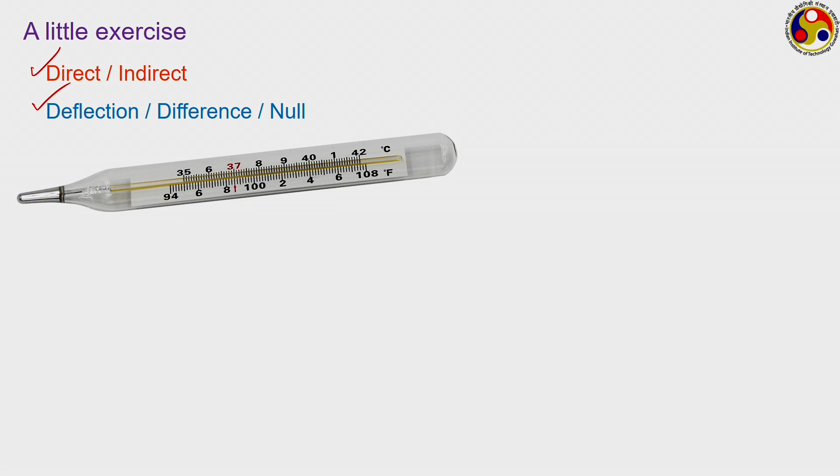Let us move to the next one, a common balance, another example we discussed yesterday. Here again you have measurement on one side, standard on the other side, so they are very close to each other, and it is a direct measurement, the direct comparison between the measurement and standard.

But what about the second category? Here also we have a pointer which gets deflected, but this pointer itself does not show the mass of whatever you have kept. Rather, our objective is to set the pointer to a 0 value to complete the measurement, meaning it is a null kind of measurement, where we put the measurement on one side and adjust the amount of standard on the other side to ensure the pointer comes to that null or 0 position. So, it is the best example of a null type measurement.

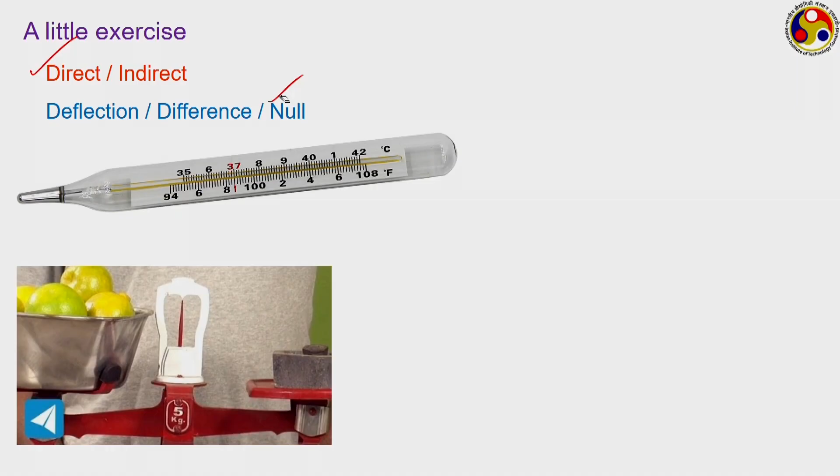Let us move to a third example. This is a common pipette which we use for taking some volume of liquid or measuring the volume of liquid. So, again it is a direct type.

Actually, all the examples I have here are direct type, and presently we have idea about very few instruments. As we go on with the course and get idea about several modern instrumentations, you will definitely have more idea about indirect measurement and learn more examples of it, but presently you are sticking only to direct ones, like where I have picked up examples from whatever you already know.

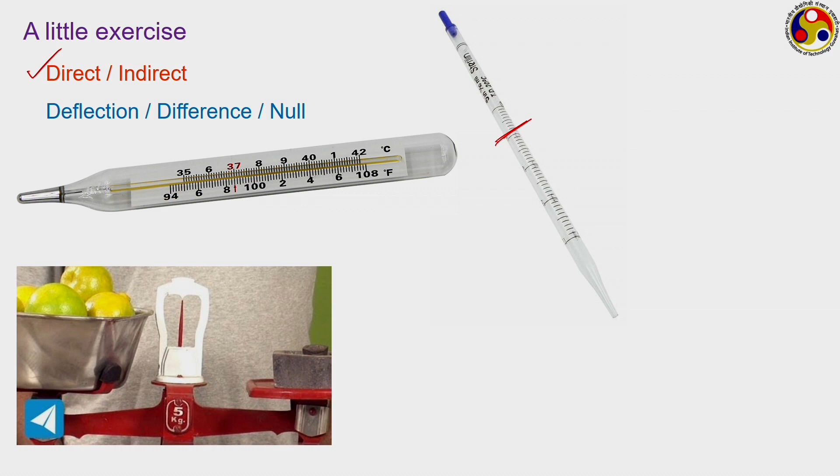So, talk about the second category. Here again the volume of liquid can directly be observed from the scales that are there. That means we are going to take this as a deflection type instrument, or categorize it as a deflection type instrument. Next one, what is this?

This is a common vernier scale or a slide caliper. Here, if we want to measure the length or any other dimension of something, we put it within these two jaws of the caliper and get the measurement from the scale that is somewhere here. Now, what kind of instrument is it?

Definitely a direct kind. And what about the second category? What is our objective? Finally to get a 0 value on the scale, or some number directly on the scale. It is not a 0 value, so it is definitely not a null kind. Whether it is a difference kind—difference means we have some reading on the scale plus a reference, and the value of the reference is added to the reading of the scale to get the final value of the measurement. Here also we are not having any kind of reference, so it again comes under the deflection type.

So, let us move to example number 5. This is the example of a common tire gauge, used to measure the pressure of vehicle tires, where we have a dial and there is a scale on the dial of pressure. Like in this example, you can see there are two scales shown: the inner one is pound per square inch, the outer one is in bar.

1 bar typically corresponds to about 14.7 pound per square inch, commonly called PSI. So, 1 bar corresponds to 14.7 PSI, and the inner scale, where you can see readings of 10, 20, 30 etc., corresponds to that PSI, and the outer scale corresponds to bar. You can also see that the one written on the outside corresponds to the outer scale, the one written inside corresponds to the inner scale.

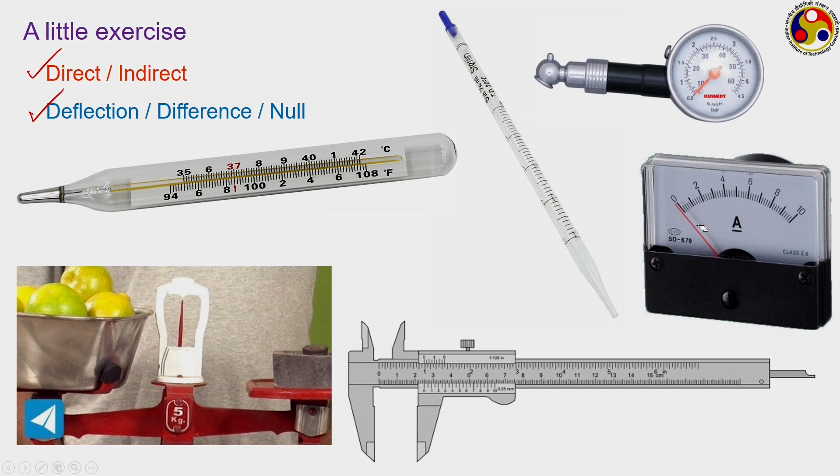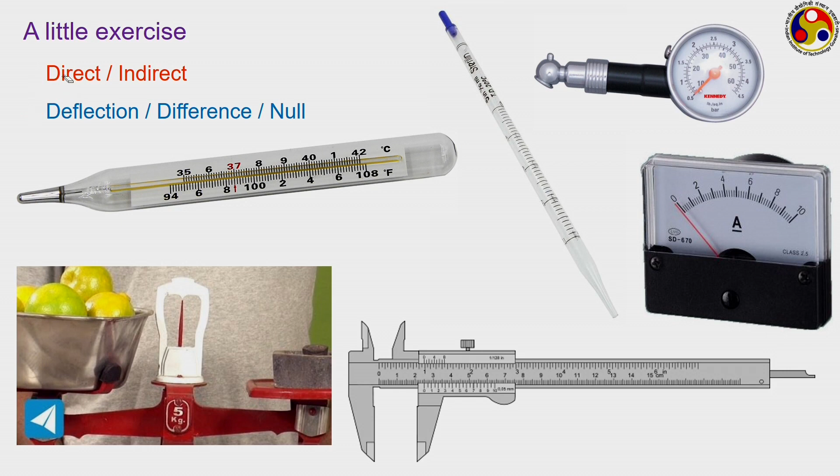So we can classify any instruments into either of these three categories, and all the six examples I have here are direct type, but in the near future in this course you will also be introduced to several indirect kinds of measurements. Now, before I move to the next slide, I would like to point out something else.

Look at this particular one. Here your objective is to measure the mass of something, and as a standard what you are using is also mass. So your measurement and standard both are mass, and hence this is directly giving the value of the mass of your measurement quantity. Similarly, this one is directly giving you the length, this one is directly giving you the volume of the corresponding measurement. But now look at the thermometer.

In the thermometer our objective is to measure temperature, but are we actually measuring temperature directly here? Probably not, because when we take this bulb, which is a pool of mercury commonly, in contact with the human body, then as the human body is at some other temperature than this bulb, there will be a kind of heat transfer. Let us say our human body is at a temperature of 38 degrees Celsius, and the thermometer initially is at 30 degrees Celsius.

Now, this temperature of the body being higher, it is definitely going to lead to a heat transfer from the body to this bulb or to the mercury at the bulb, and on receiving this heat, the temperature of mercury itself will keep on increasing till it attains thermal equilibrium with the body, that is, till the temperature of mercury within the capillary attains this 38 degrees. So there is about 8 degrees Celsius increase in the temperature of the mercury, and like any other material, with increase in temperature, mercury also will expand in volume, and that increase in volume will be manifested as a change in the length of the mercury column within this capillary.

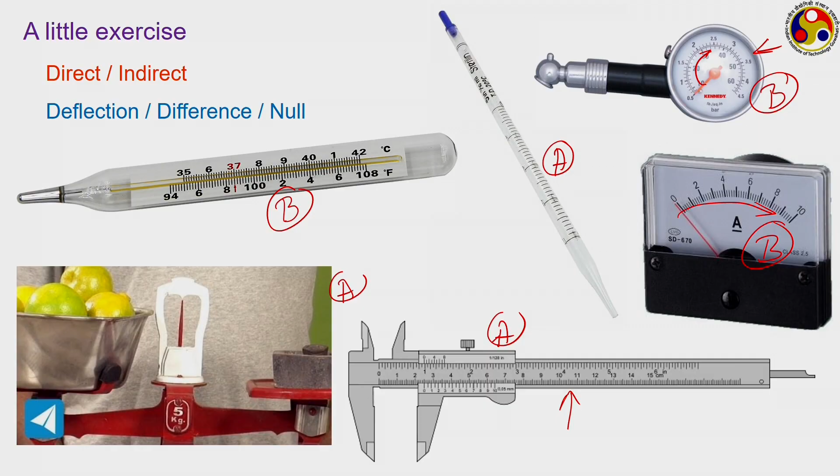But in all Type B instruments, our output comes not in terms of the measurement, but in terms of something else. Like in a thermometer, our objective is to measure temperature or change in temperature, but the output comes in terms of change in volume, or change in length of the mercury column in the capillary. So Type B instruments are probably much more common than Type A, unless in very simple situations like measurement of length, volume or mass, where we can use Type A. For most measurements we have to go for Type B instruments.

In that context, I am going to introduce this particular term, transducer. A transducer is a device which converts energy from one form to another. This particular process of energy conversion is often referred to as transduction.

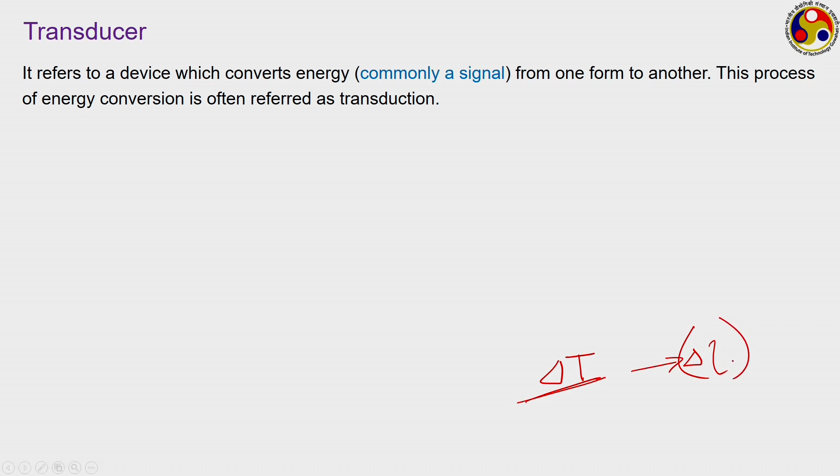Think about the thermometer again. Here our input to the device is some temperature change, delta T. The thermometer was initially at 30 degrees Celsius, and coming in contact with the human body, its temperature increases to 38 degrees. So we have an 8 degree temperature difference, which is the delta T, your actual input signal, but your output comes in terms of a change in length of the mercury column in the capillary. So there is a change in the signal: while our input is a thermal signal, thermal energy, the output gets manifested in terms of a volume or length.

Like in the tire gauge, our input is pressure or force, but the output comes in the form of deflection, and the device that does this is called a transducer. A transducer can be anything, like any measuring instrument, so it can be categorized as a transducer. Depending on the output, we can call it a mechanical transducer, like the pressure gauge, where the input is force and the output is a deflection, which is a mechanical kind of output. Maybe in a thermometer too we can call it a mechanical transducer.

But here is another example where some physical quantity in a transducer gets converted to an analogous signal. Here also you are measuring temperature, the input signal is temperature, but the output signal is some electrical quantity, like what happens in a thermocouple. We shall be talking about thermocouples in the concerned module, but the gist is there: the input has been converted not to a mechanical output like in a common mercury thermometer, but to an electrical quantity. So we shall call this an electrical transducer. We can have mechanical or electrical transducers, and other types also, but mechanical and electrical are the ones commonly used for mechanical measurement.

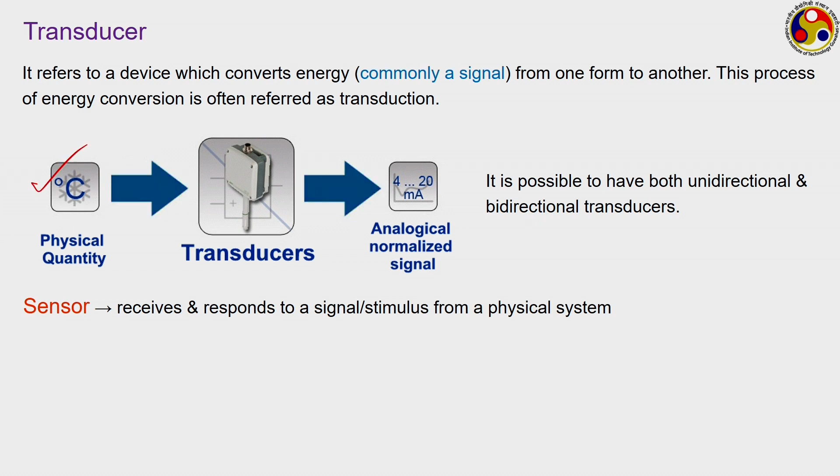Now transducers again we can commonly identify as two types. One is a sensor, which receives the signal from some physical system and prepares an according response, like the example shown here. It is receiving the signal in form of a change in temperature and converting that to an electrical signal which will be used for further processing.

And the other one is actuator. Actuator will take the signal from some processing unit. Sensor generally sends the output to some processing unit commonly, but the actuator will take it from some processing unit or from some control system, and then will perform some kind of mechanical work.

Like in case of that tire gauge, if you think of the pressure signal which is being supplied to your device, it has gone through some steps of conversion by some mechanism. Or we may think about that ammeter, a much better example probably, where we are supplying current as the input. Now your transducer is converting the current to a mechanical signal which leads to the movement of this indicator over the dial. That, we shall be calling an actuator.

So transducers primarily are of two types, sensors and actuators, but we can have other kinds of transducers also. Sensors are primarily related to the input of the measurement system, which is in direct contact with your physical system, takes the input and if required converts it to some other form, whereas actuator takes the input from the control system and primarily is related to the output, giving you the output in the desired form.

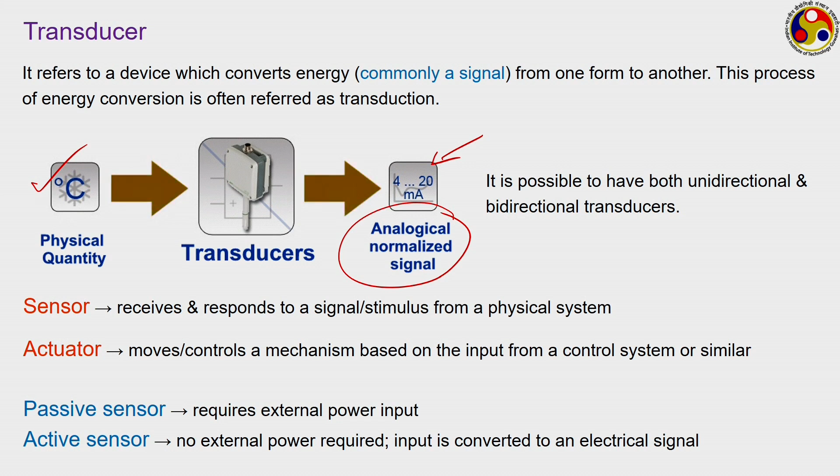We can also have passive and active sensors. Active sensors are those which do not require any external power input, but passive sensors require an external power input. In active sensors, the input itself is converted to an electrical signal, like in this case of a thermocouple, where despite thermal energy being your input, it gets converted to electrical signal, and that electricity itself will be used for further processing. So that is a kind of active sensor. Examples of passive sensors we shall be seeing shortly.

Next we move to the general structure of the measurement system. In a measurement system, all the components, whatever simple or complicated it may be, we can generally identify three different blocks: one detection block or input block, next the signal conditioning block, and next the output block.

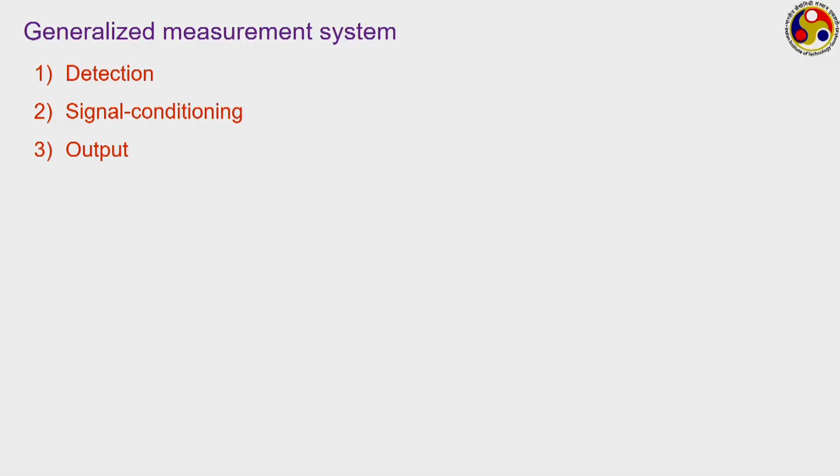There are several characteristics that we want our measurement system to have. It should be low cost, easy to use, not requiring any special expertise, like a thermometer, which is generally easy to use and requires hardly any expertise, such as a common clinical thermometer. So we prefer to measure the temperature of our body using a thermometer, despite having several much more accurate instruments available.

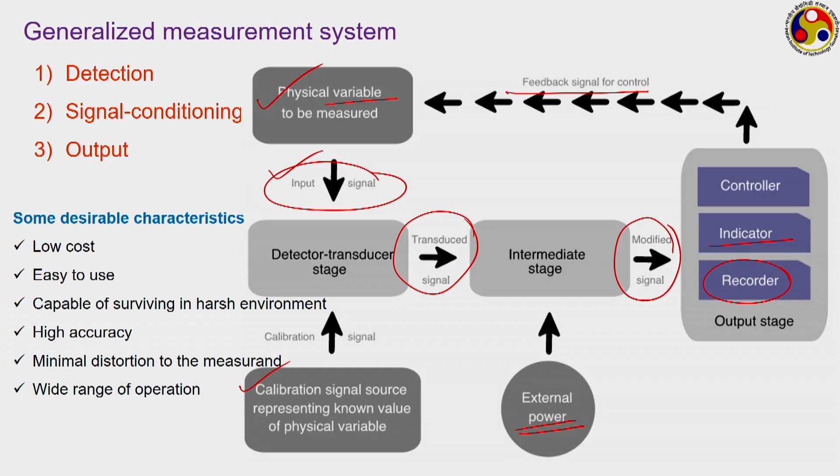Also, the range of operation should be wide, and it should suit whatever target application we have. Next we talk about a few examples again.

First we have a spring balance. Spring balance is used to measure the weight of something. We put the measurement somewhere here, and the corresponding gravitational force causes a deflection of the spring which is inside the body, and the deflection of the spring causes a change in the position of the indicator. So from the final position of the indicator we get the value of the weight in terms of whatever unit we desire, like the example here shows 1 Newton on one side, and maybe in terms of mass scale, kg mass or kg force or gram force, on the other side.

Now try to identify the 3 stages here. What is your input stage here? Your input stage is this hook, which is sensing the gravitational pull on this and converting that to some form of mechanical force on the spring which is inside.

Your processing stage here corresponds to the spring. That spring takes the mechanical pull from this input stage and converts that to some other kind of mechanical pull on the indicator, allowing the indicator to move. So this hook itself is acting as the sensor, which is sensing the input and converting that to some kind of signal which will be used by your processing part, which is the spring.

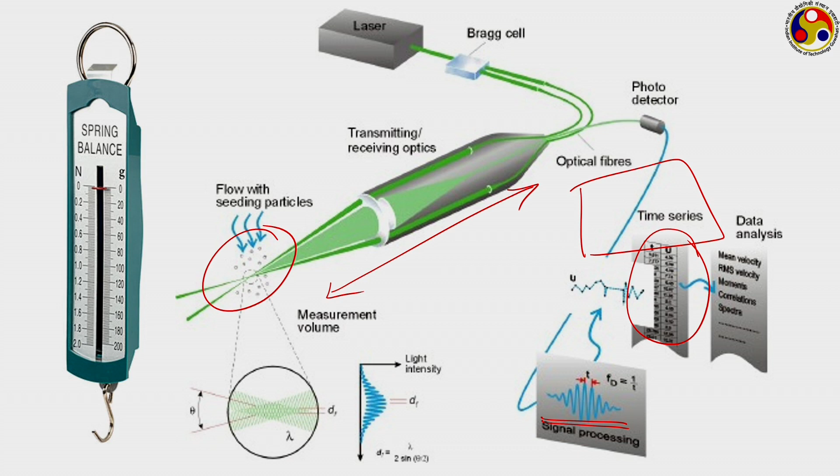Think about the thermometer again, since we keep going back to the same example. What is your input sensor? The mercury bulb is the input sensor. What is the signal processing stage? Again the mercury itself. And finally your output stage is the mercury column and its positioning, the position of the tip of the mercury column on the corresponding scale.

So the same component can also act as multiple stages depending on the instrument. In simple instruments we can find this kind of situation, but in more complicated instruments we can clearly identify three different stages. Now, the input signal.

The input signal can be classified primarily into two categories. One is based upon the time relationship, meaning how the input signal varies with respect to time, and the second is based upon the nature of the magnitude of the input signal.

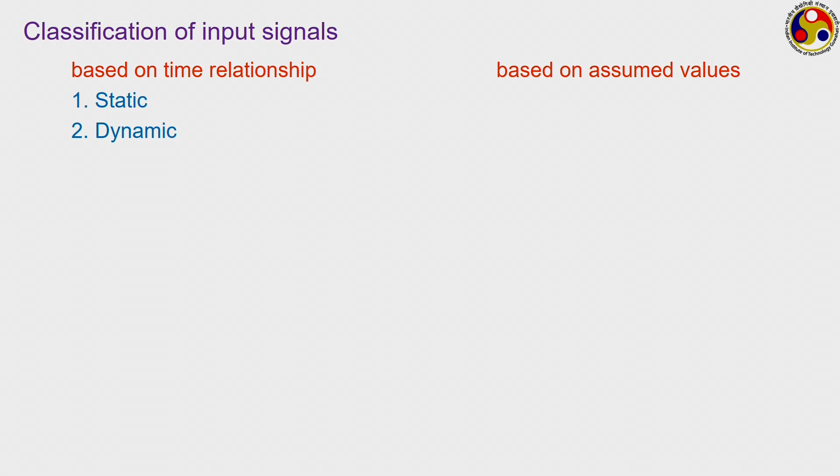Based on time relationship, we can have static or dynamic. Static refers to input that is not changing with time, like when measuring the mass of something using a common balance - the mass of the body is not changing, so that is a static signal. When measuring the pressure of a vehicle tire using a tire gauge, if that pressure is not changing, that is also a static signal.

But a dynamic signal refers to one that keeps on changing with time. Suppose we take some volume of water, put it on an oven, and switch the oven on, so heat is being added to the water. Now we take a temperature measuring instrument and dip it into that pool of water. As the water receives heat, the temperature of the water pool keeps changing, and accordingly the input going to your temperature measuring instrument is also changing. That means it is not a static signal anymore - it's a dynamic signal, one that changes with time.

Dynamic signal can be of two types again: one is steady state periodic signal, the other is non-repetitive transient signal. Periodic means, as the term suggests, we have some kind of periodicity - a cycle of input that gets repeated over a particular interval of time. The other one, when there is no such repetitive nature, we have a non-repetitive signal.

Repetitive signals can be thought of as cycles, like the time of day - over a 12-hour period, time itself gets repeated. We can have high tide and low tide situations where the water level in a river or ocean keeps changing with time. Several common lab-scale instruments can also lead to periodic change. And non-periodic is where we do not have such repetition - like atmospheric temperature, which is generally a non-periodic kind of input that keeps changing with time without any repetition or periodicity.

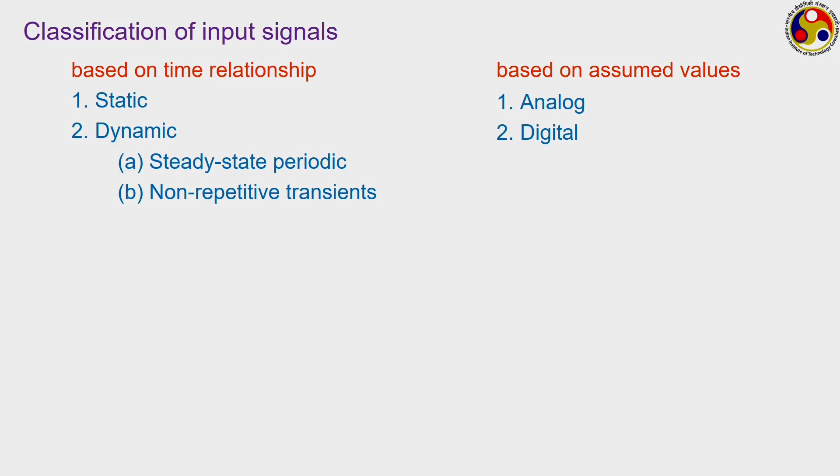Based on assumed value, we have the very common kind of input classification: analog and digital. Analog means it keeps changing with time continuously, and for every time instant we can have a value. Whereas digital means we are picking out the value only at certain time intervals, and instead of having a continuous representation of the input, we have a discrete representation of the input.

Here is an example. The one at the top, shown in green, is an analog input. For every value of time we have some value of the input signal - like here for this time we have a value of input, for this time we have a value of input, and for this time also we have a value of input.

Theoretically speaking, we can have an infinite number of values for the input signal. It is a continuous representation. Such continuous representation we can get in several common instruments, like a thermometer or a tire gauge, where as the temperature keeps changing, the mercury column's tip also keeps changing its position, giving us a continuous representation like the analog one.

Digital, however, is where we are not going to take the signal value at all times, rather only at certain time intervals. Like here we've identified this time where we want to take up the value, so we get this particular value. Next, after a certain time interval apart, we take the second reading here, and we get this value. This way, after a fixed or changeable time interval, we keep getting values of the corresponding signal, like here, another one here, another one here.

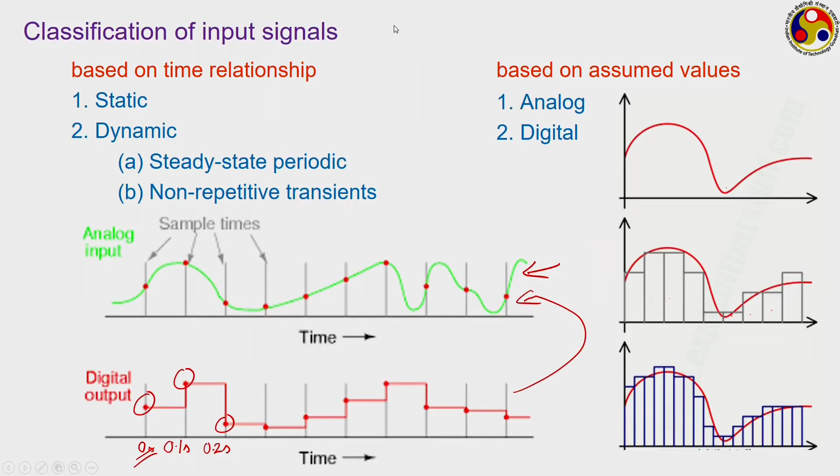But still digitization has its own advantages. In case of analog signal, we get a sine wave or basically a continuous time-varying signal, whereas in case of digital we get only square waves. Like in the previous figure, here we have only square signals. Analog gives continuous representation, digital gives only discrete data points.

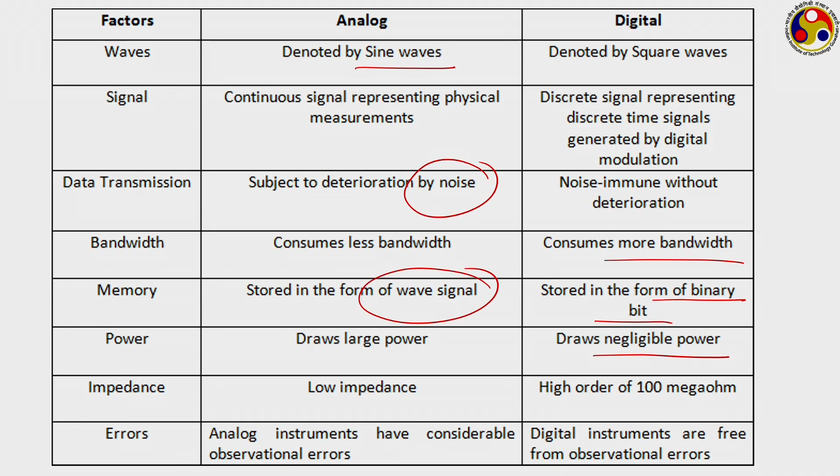In analog there is a big probability of deterioration from noise, as we are acquiring the signal continuously, and interfering signals can also come into picture. In case of digital, as we are taking only certain points, it is highly immune to noise. The bandwidth requirement can of course be much more. In analog we store the signal itself, but in digital we store it in binary or similar format, and the power requirement is also much lesser in digital. It is much easier to process the digital signal during the signal conditioning stage, and that is why digital signal has its own advantages, and that is why the trend for modern instrumentation is to move towards digital.

We shall be discussing more about this digital signal and analog to digital conversion in the third module of our course.

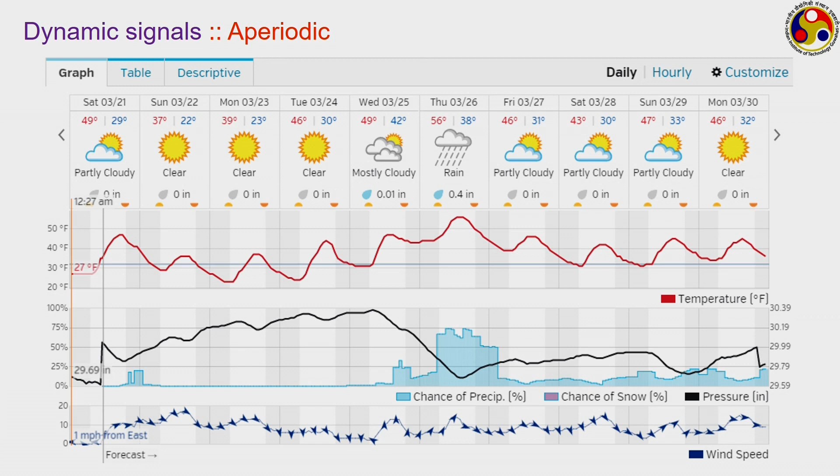Aperiodic signals, like the variation of temperature over a day or over a longer duration, or any kind of weather data, are probably the best example of a dynamic signal which is not periodic in nature at all. In several measurement situations we face aperiodic dynamic signals.

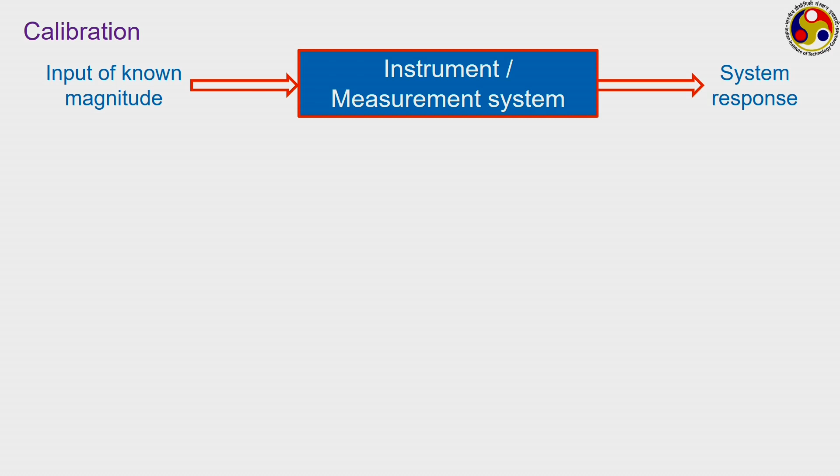Now we come to the stage of calibration. Any instrument has to be calibrated to start with, and calibration means the instrument will be subjected to a known magnitude at the input stage, and whatever response we get at the output stage, in whatever form, we record that and then try to identify the correspondence with the input.

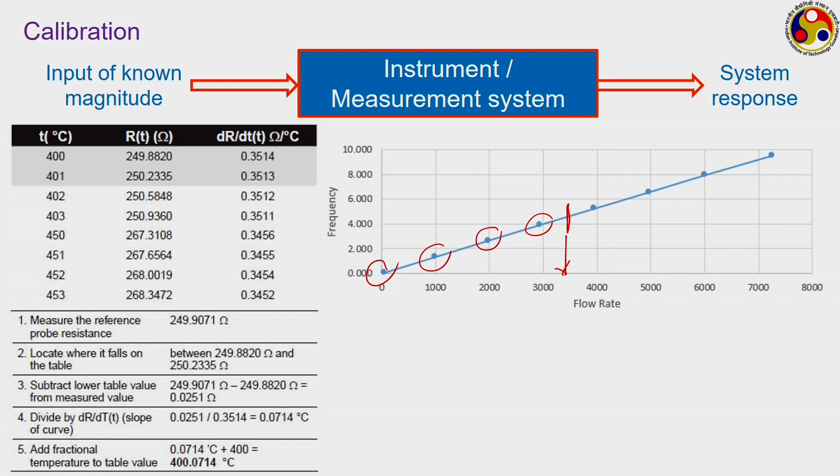This calibration curve generation is a must for any instrument to start with. Generally, whenever we purchase a new instrument, simple or complicated, it comes with a calibration chart provided by the manufacturer, but it may be required to recalibrate the instrument repeatedly after a few periods of operation. When we do calibration based on time-invariant input and output signal, we call that static calibration, and the corresponding curve is called a static characteristic curve or static characteristic. However, when both inputs and outputs, or at least one of them, vary with time, we call that dynamic calibration, which is much more complicated since at every time we can have a different nature of signal. The corresponding curve is called dynamic characteristic.

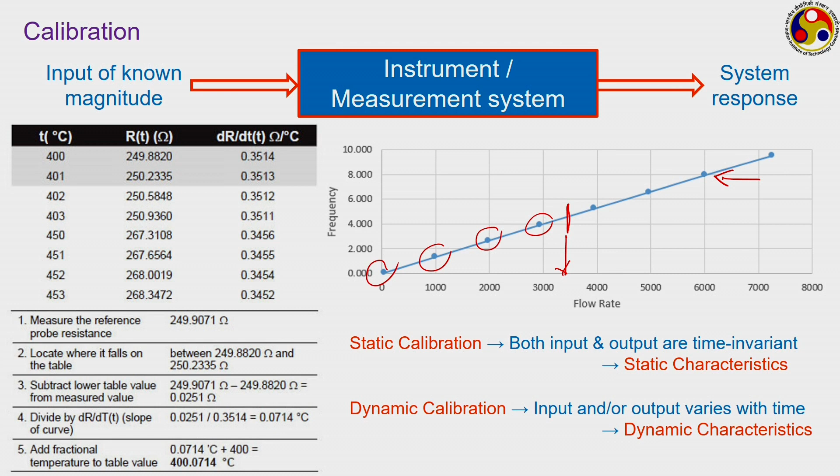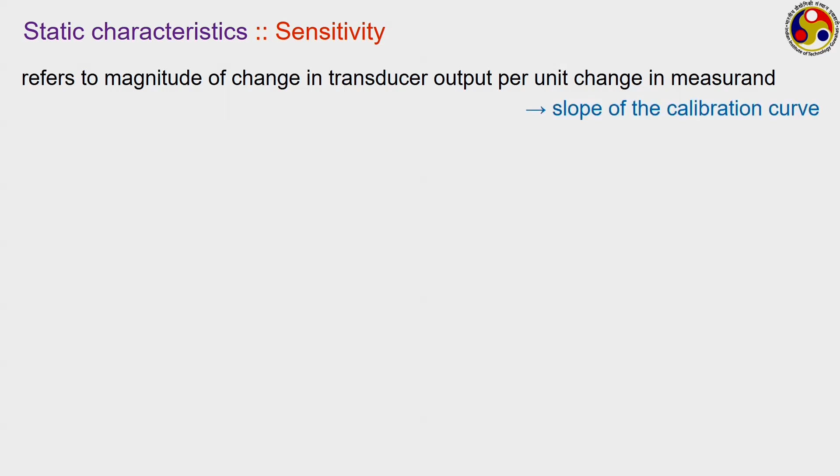Let us discuss a few properties of static characteristics which an instrument must have. The first and most important is sensitivity. Sensitivity refers to the magnitude of change in the transducer output per unit change in the measurand, meaning it gives you the slope of the calibration curve. If x is your input and y is the output from your transducer, then the slope of this curve — this much change in input dx giving this much change in output dy — is the sensitivity of the instrument.

In this particular case the slope does not change with the change in input, so we call it static constant sensitivity. However, we may also face a situation where the sensitivity of the instrument keeps changing with the input — then it is variable sensitivity, because it depends on the input.

Now, do we want higher sensitivity or lower sensitivity for the instrument? Definitely we always want our system to be more sensitive. Think about the thermometer example again. We have a change of 10 degree Celsius temperature. If that 10 degree change causes an increase of 5 mm in the mercury column in case 1, and in another case it causes a 10 mm length change, then which one is more sensitive? Definitely the second one, because the change in output for the same amount of input is more, so it is a more sensitive instrument.

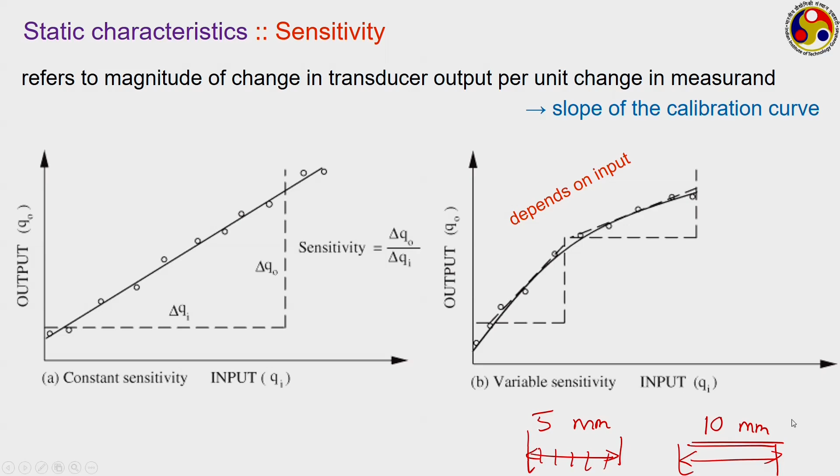Over a distance of 5 mm we have to draw a temperature scale showing at least 10 divisions to indicate a 10 degree change in temperature — that means for every millimeter we have 2 degrees change. But in the other case, for every millimeter we have 1 degree change, which is much easier to draw on the scale. So we should always go for an instrument with higher sensitivity. But sensitivity should not be confused with accuracy, which we shall discuss later.

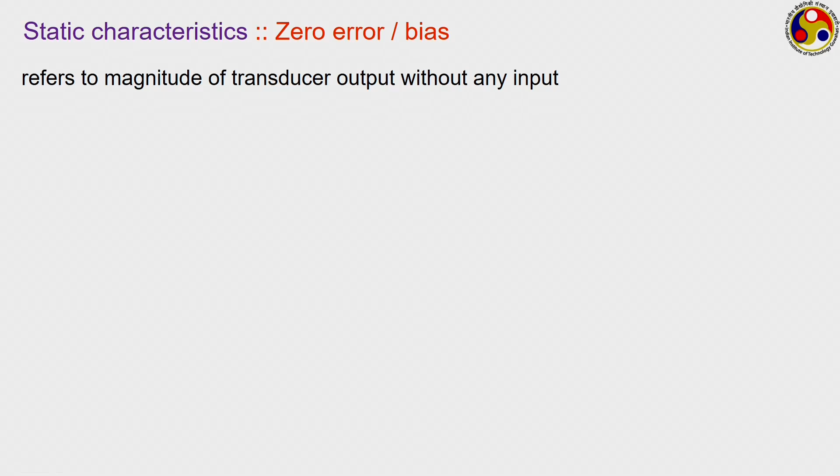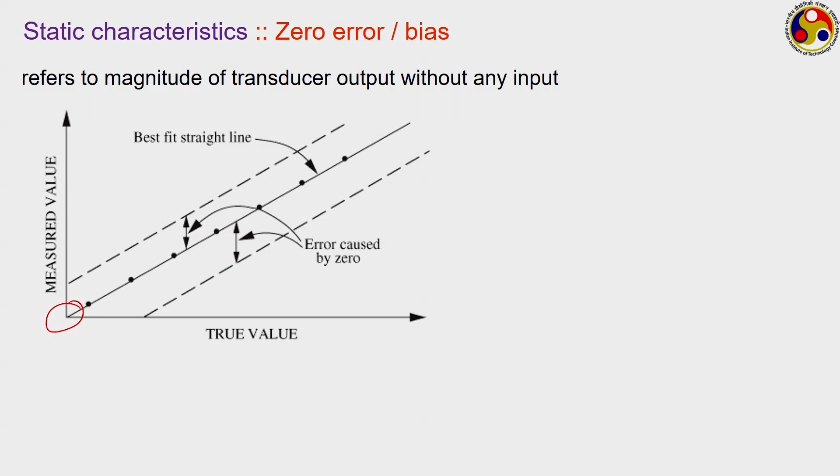Next is zero bias. It refers to the magnitude of the transducer output when no input is given at all. There may be several situations — ideally, in case of ratio measurement particularly, we want the output to be 0 when there is no input, but sometimes the instrument itself may have some internal error and it starts the reading from a different point itself. You must have seen such situations with weighing scales.

You have not put anything, but it is showing some reading here. This is what we refer to as zero error or zero bias. It can be both on positive side or negative side, like in this case.

So we have to be careful about the zero bias in your instruments, and ensure that the instrument indicates zero output when there is no input. If there is any zero bias, we need to keep a note of that, because whatever final reading you get, you have to subtract that zero bias to get the actual value of the measurand.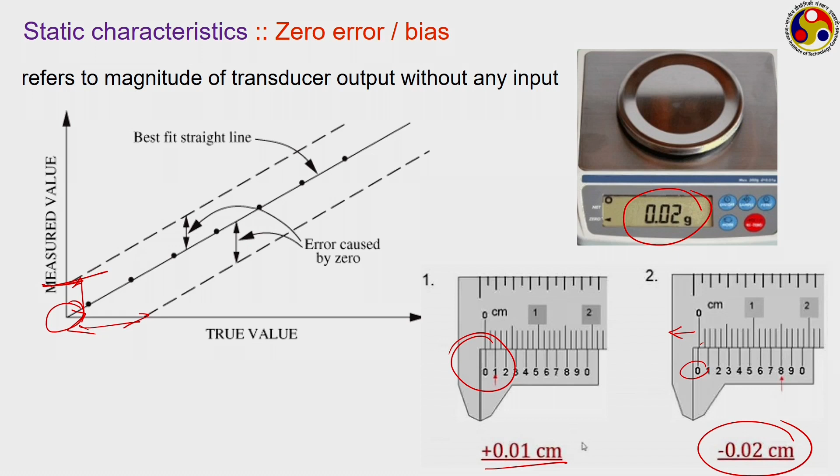Next is resolution, very important for an instrument. It refers to the smallest change in input required to cause a change in the transducer output. This is different from sensitivity.

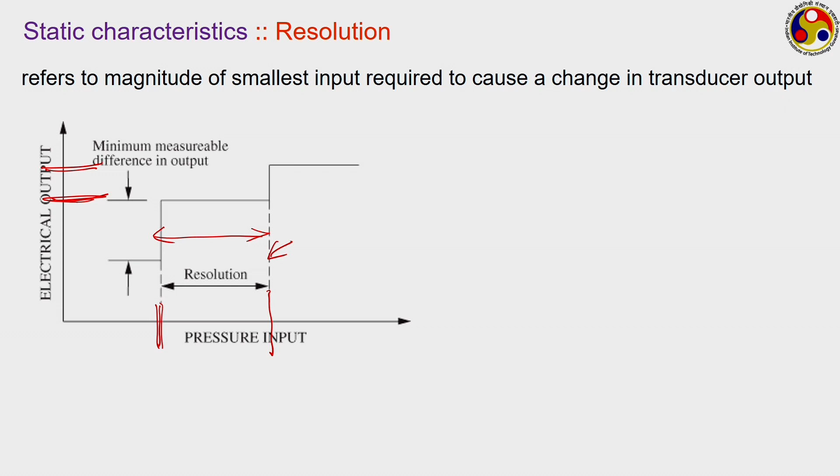Here, initially your system is having a pressure value of this, and the corresponding output is this. Now we are increasing the pressure, but the system is not able to show any output till we reach this particular level. That means over this entire range of change in input, your system is showing the same output value. Only when you reach this particular point is there a change in the output to this. This is called the resolution of the instrument, which also gives us an idea of the minimum value we can measure with our instrument.

Resolution of an instrument can depend upon the construction of the transducer, can also depend on the noise of the system if anything is present there, or the numerical resolution of the data logger.

Here we have a situation where several cases are shown, where the continuous line is the perfect representation or perfect output from the sensor which we want. In this case number 1, your system has very high resolution, because with very small change in input it shows a change in the output, but the value we are getting does not match the actual curve. So it is high resolution but low accuracy.

If we move to this one, it is low accuracy because it moves away from the actual curve, and also low resolution because this much change in input is required to cause any single change in output. It is a low resolution instrument.

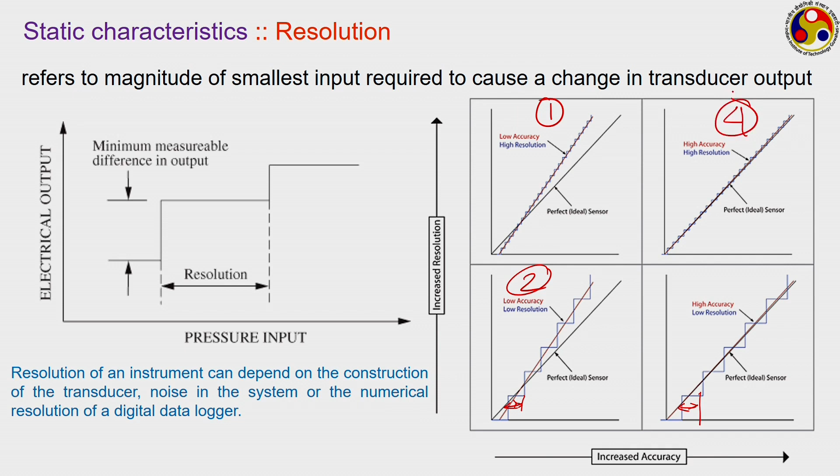Now this one here, we are still at low resolution because a large change in input is required to cause any change in the output, but it is much closer to the actual curve, so it is high accuracy and low resolution. Number 4 is the ideal situation - it is high resolution and high accuracy as well. So this kind of instrument is always preferred.

It is not that we always have to go for instruments having very high resolution. Sometimes we also use another term called least count. Least count refers to the smallest value the instrument can give. It is not that we always have to measure with instruments of very high resolution.

Think about measuring time. Say we are presently at Guwahati and want to take a flight to Delhi, and we want to measure how much time is required during the flight. Now the time is coming in the range of something like 2.5 to 3 hours. We can easily measure that with a common wristwatch, where the smallest time interval you can measure is maybe a minute, maybe a second.

So the smallest value you can measure is 1 second. If there is any change in time you want to measure which is less than 1 second, your wristwatch will not give that. But in the example I am talking about here, you do not need that at all - you do not even need seconds. Minute and hour are sufficient.

Think about how much time Usain Bolt takes to finish his 100-meter run. I think the world record is 9.58 seconds. So we are talking about measuring a time of 9.58 seconds. Can a wristwatch give that? Definitely not, because here we are not only trying to measure seconds, rather we are trying to measure 1/100th of a second.

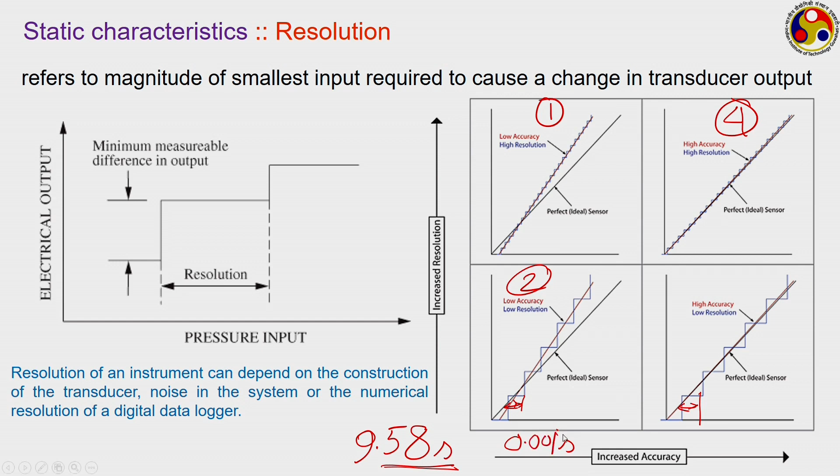That means you need an instrument which can measure at least 0.01 second, the smallest possible change, and preferably up to a third decimal, because there are situations where you may have to go for a photo finish, and there even 2 decimal points may not be sufficient. We may have to measure even the third decimal point. So there we need an instrument with such resolution, but not always.

That depends upon the application, and accordingly you have to choose the resolution of the instrument. So resolution and sensitivity are probably the 2 most important static characteristics a system should have. Range and span refers to, as the term suggests, the maximum and minimum the instrument can measure, like the example of the run I talked about.

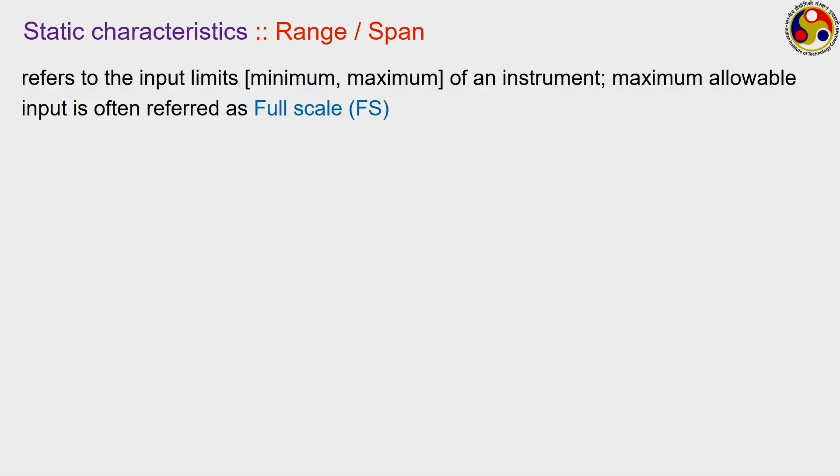In a wristwatch we can measure up to 12 hours in a dial, whereas when we are trying to measure time with a resolution of 0.01 second, we hardly need such long duration. Your instrument may just give a reading of 0 to 10 seconds, 0 to 15 seconds, that will be sufficient for that measurement. So range will depend on the kind of application.

Here we have an example of a few pressure gauges. You can see there are 3 pressure gauges, all giving readings in PSI. In this case we are getting a reading up to 100 PSI, here up to 200 PSI, whereas here up to 5000 PSI. There may be different situations, and accordingly we shall be choosing the gauge.

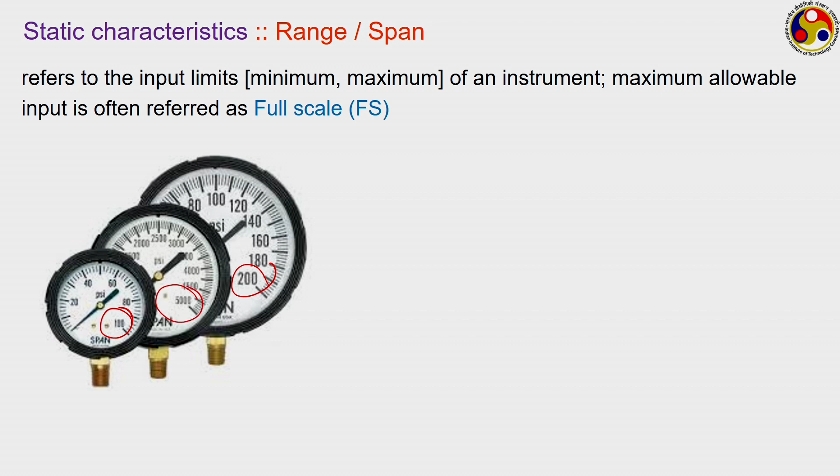Another example, what is this? I am sure you know this. This is the sphygmomanometer which medical practitioners use for measuring blood pressure. Now what is the highest value here? 280. But what is the unit of this? We have to be careful. It is not PSI, not bar, none of them. It is millimeter of mercury.

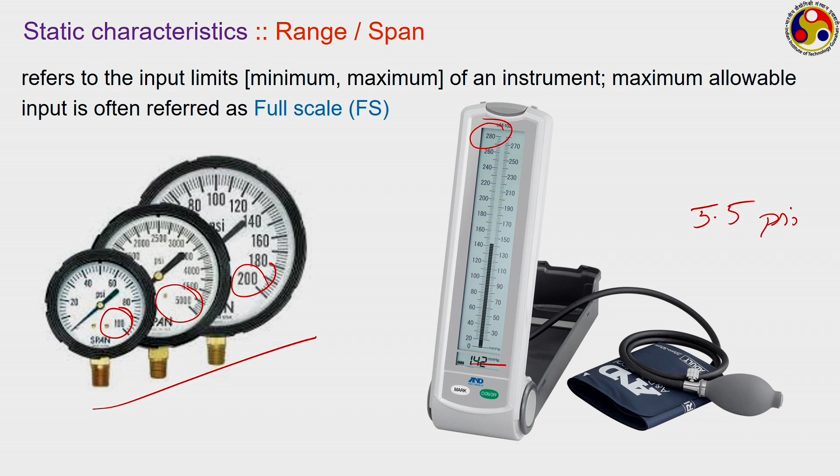1 millimeter of mercury corresponds to a very small PSI value, or practically 1 PSI corresponds to something like 51.7 millimeter of mercury. That means this scale of 280 is actually going to give you only approximately 5.5 PSI, a much smaller range compared to the other gauges. But we do not need a much larger range when measuring blood pressure, so this sphygmomanometer itself is sufficient in this case.

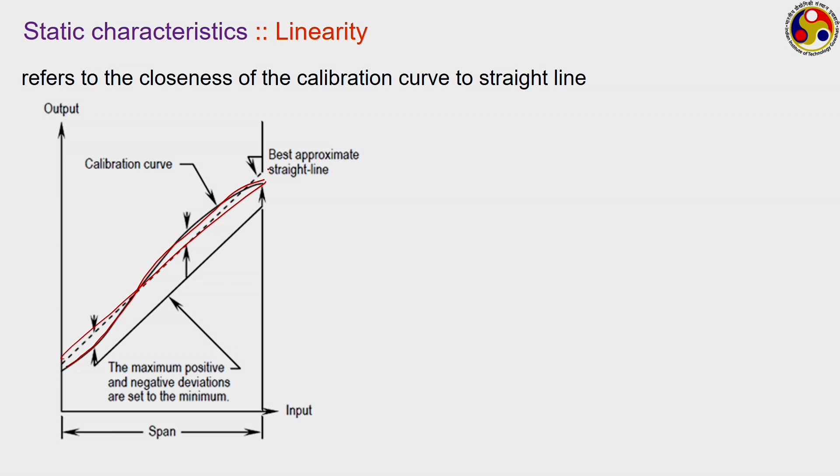There are two ways to do it. One is to put two parallel straight lines, for example with input x, output y, and a few data points from calibration, which encompass most of the data to get a measure from there. The other is to find a calibration straight line using a relation y equal to mx plus c, identifying the value of m and c from this calibration curve, used for unknown measurement.

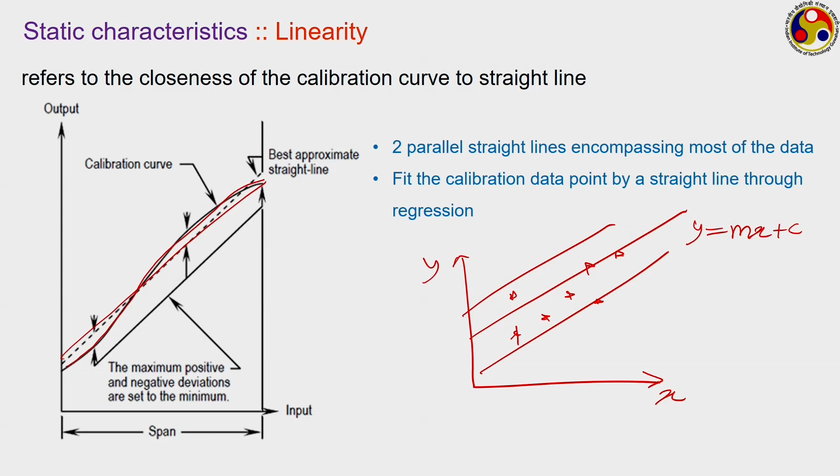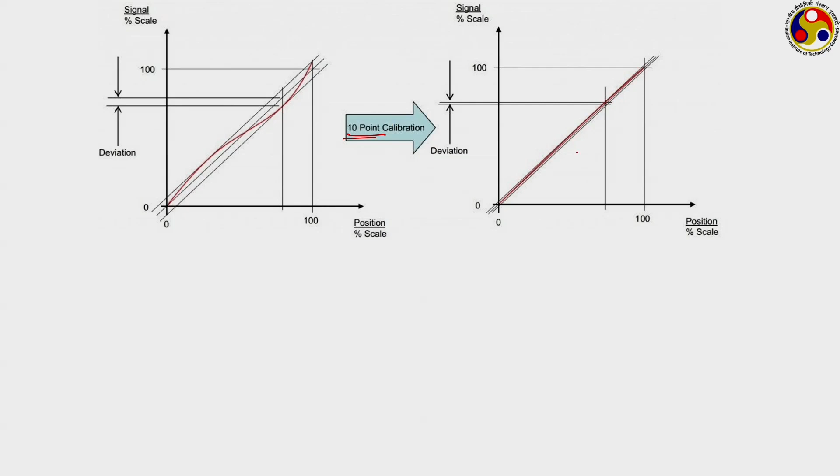Linearity is a desirable property, not always possible to get, but we would like the response to be linear. Here we have a non-linear response. By digitizing this, we pick up 10 points, and for such a regularized response we get a much more linear nature. But when the response is very non-linear, or highly time-variant, then a 10-point scale is of no use.

The final characteristic we would like to talk about is drift, which refers to the change in the calibration curve over a period of time.

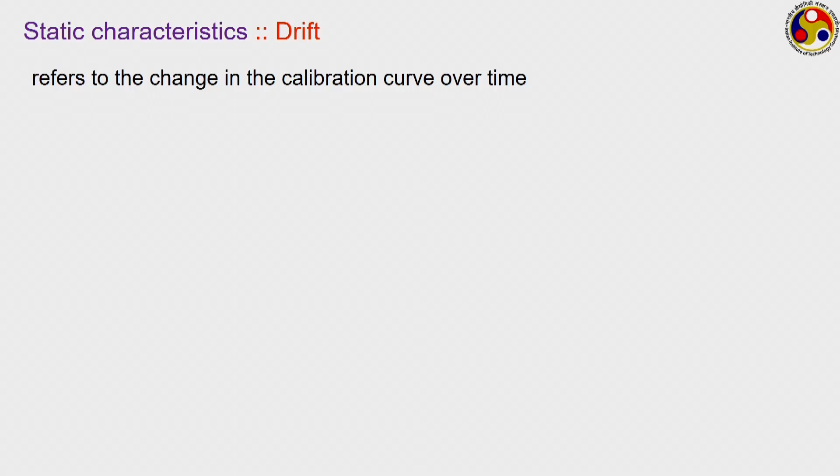Once you have calibrated the instrument, due to aging, wear and tear, and certain damage, the calibration may get shifted. We generally have two kinds of drift: zero drift and sensitivity drift.

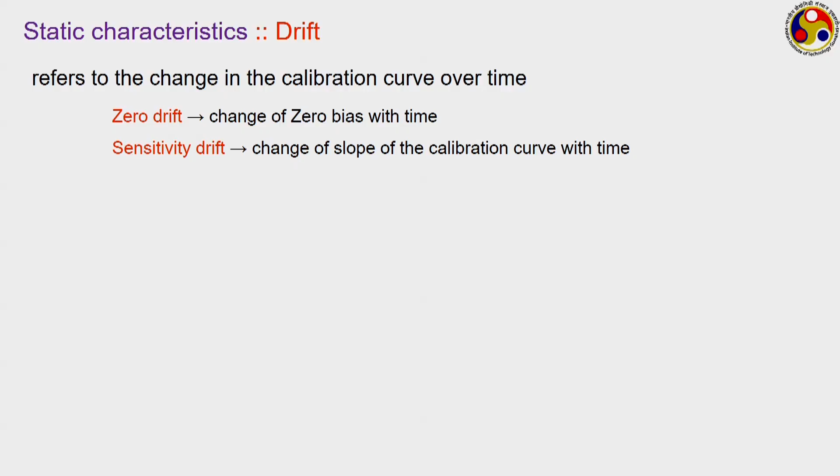Zero drift refers to the change in zero bias—this dotted curve is the original, but with time a zero bias develops, that is zero drift. The second type is where the slope of the curve itself changes, that is sensitivity drift. In some cases, it is a combined curve where both zero and sensitivity drifts are present.

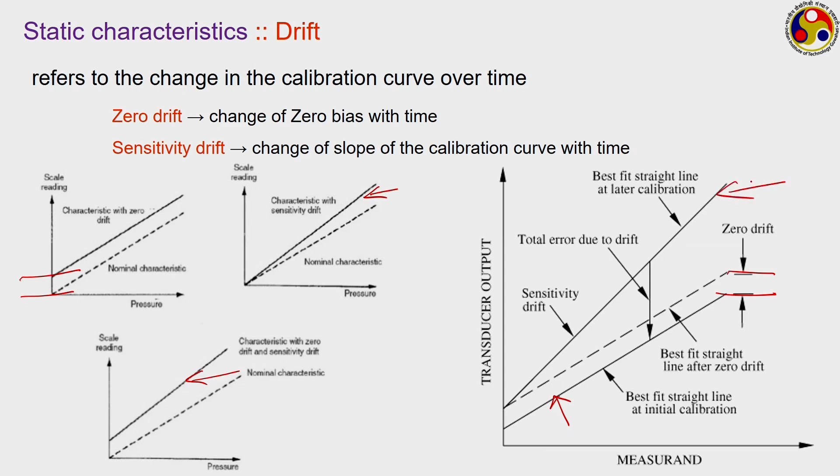When that kind of situation occurs, we may have to go for recalibration. In this case, this was the original curve. Now we can see there is a zero drift that has developed, and also a sensitivity drift. So if you recalibrate, this one may emerge as the new calibration curve. This drift therefore necessitates repeated or periodic calibration of your instrument.

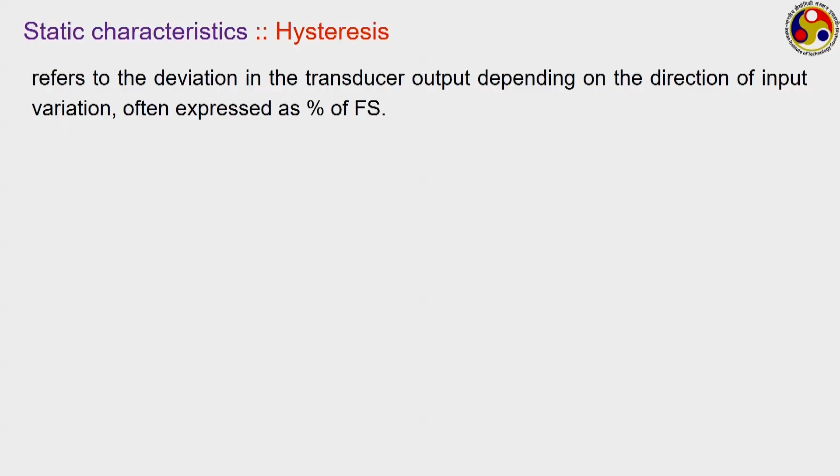Hysteresis: certain instruments may show a hysteresis behavior, that is the output may depend on the direction of change in input. When you are moving in the forward direction for a particular input, you get this output, but when you come back for the same input, you may get a different output.

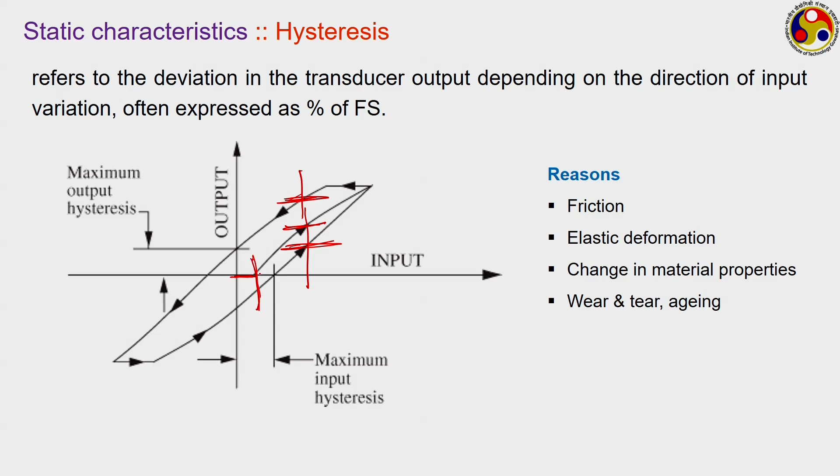That is called dead zone or dead space. After showing an output corresponding to input, when we change the input signal, the transducer may take a certain amount of time—maybe seconds, maybe nanoseconds—to represent that on the output side. That is referred to as dead time.

Threshold is the same as the dead zone. The first value of input for which we get an output is the threshold.

Repeatability—we have already talked about this in the previous lecture. We need to repeat the experiment using the same instrument, and if all results come very close to each other, we consider the instrument reliable and say it has good repeatability.

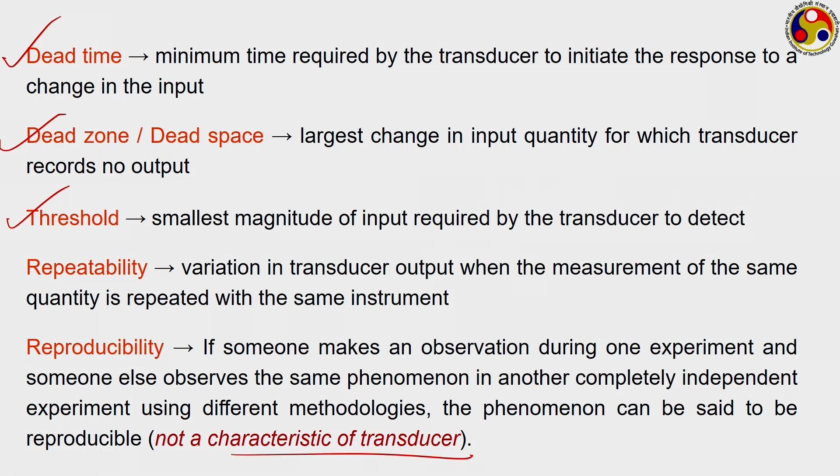Reproducibility, truly, is not a characteristic of the transducer itself, it is more a characteristic of the phenomenon. Suppose I do one experiment in my laboratory using a certain set of instruments and observe something. Someone else far away does the same experiment using different instruments and observes the same phenomenon—that is called reproducibility. It is an important concept in any research or R&D, that the phenomenon or observations has to be reproducible, but it is truly not a characteristic of the transducer itself.

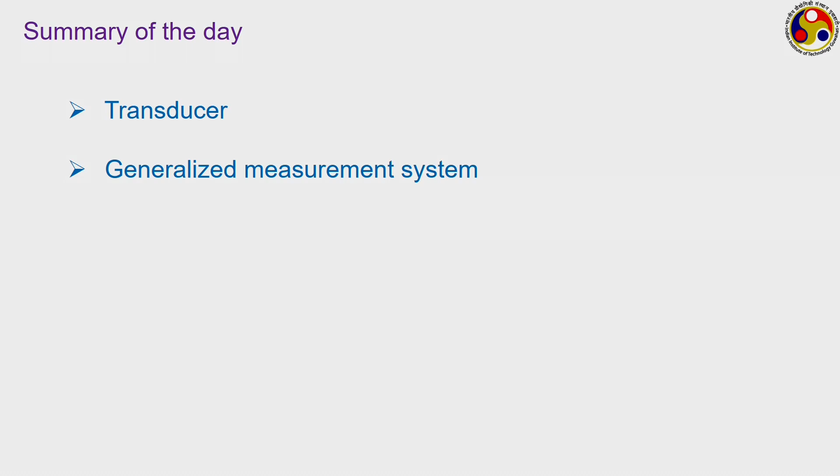This takes us to the end of the different characteristics we need to know—static characteristics of an instrument. To summarize today's discussion: we talked about transducers, actuators and sensors, then a general measurement system with three stages—an input stage, a signal conditioning stage, and an output stage.

Then we talked about different types of input signals: digital and analog, time invariant and time variant. We also discussed the process of calibration, and the corresponding static and dynamic characteristics.

Finally, we talked about the different static characteristics a system or transducer should have. The most important characteristics for a transducer are sensitivity and linearity. It should have high sensitivity and a linear nature. Resolution depends on the application, the drift should be as low as possible, and hysteresis kind of error should ideally not be present in the instrument.

We shall be continuing with this module 1, where we shall discuss the different kinds of errors that may creep into your calculations and how to eradicate them, along with a few other relevant discussions to close up this first module. So please wait till the next lecture.